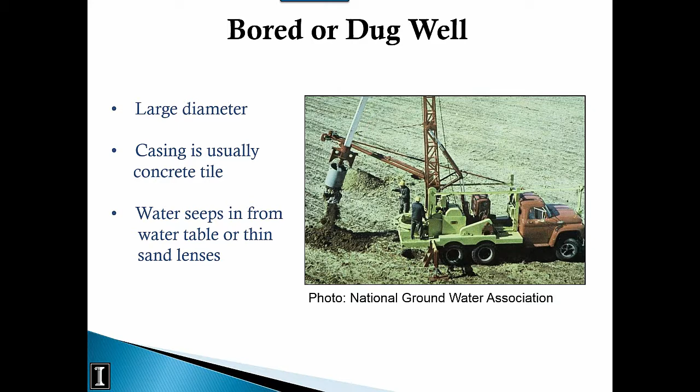By itself, that means that it's water at the upper surface of where the saturated soil is. That could be at 5 feet, it could be at 15 feet, it could be at 2 feet. So it's water that has more influence from the surface. So typically these sorts of wells, we see more contaminants than in deeper wells that are drilled and they're pulling their water from a deeper source.

These are 3 examples of dug and bored wells. All 3 of these are greater than 3 foot diameter. The one at the top left is an old hand dug well. You can see here it's on a slope in a pasture. There's a cornfield above, a gradient up above, which means there's probably been pesticides and nitrates applied.

Those posts are so worn because there's cattle in that pasture, and they come up and rub on those posts to scratch. It's covered with 2x10s and then some tin and then some concrete blocks to hold it all down. Snakes, rodents, spiders, everything else can get in that. And so that well, it would be amazing to me if that well didn't have coliform problems all the time.

And you can see even on the lower right how it looks like there's some mud there, and that's where the cattle, it's been raining or whatever, and they've been there enough that they've made that kind of a little mud spot. So all that's infiltrating in, it's coming in shallow. We still see a lot of hand dug wells that are very poorly constructed and not protected well at the surface.

The one on the right is a concrete tile 3 foot diameter well that has a concrete cap. If you assume that that's a 4 foot section of concrete tile that's sticking about a foot out of the ground, that means the first seam is down at 3 feet. Now, if this is concreted around the well down to 10 or 15 feet, then that's not an issue. But if it's not, then that means water can seep in at 3 feet.

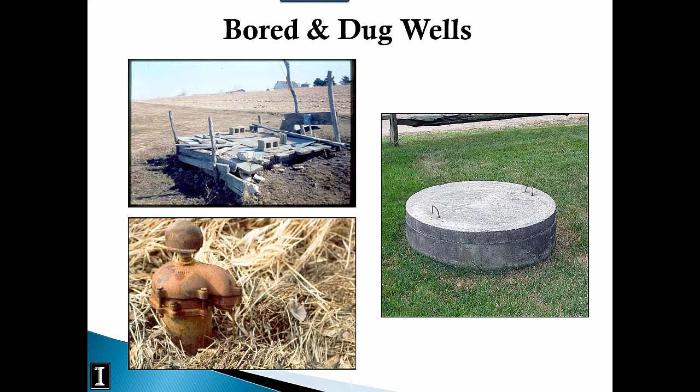So here's those 2 examples. The one on the right that was a concrete tile to the surface is the picture on the left here, and you can see they show the best practices for this is to put concrete in the upper 10 feet, or a minimum of 10 feet, so that water can't seep in from the surface and it can't get into that well until it gets at least 10 feet below land surface.

The one on the right is the picture that was on the lower left on the other side. At the top it looks like a regular 6-inch diameter well, but when you get down to 10 feet or below, then the large casing part of that starts. And again, this is an area where there's really no aquifer, and it shows in the picture here that there's some sand lenses in the soil, but it's mostly fine textured soil, clay and silt, and so those sand lenses may hold a little water, but it's water seeping through the clay and silt that gets into the well.

And the whole point of a large diameter well is to create, it's almost like a cistern. It's meant to store water so that it can seep in slowly, and then as you use water in your house, it may drop the water level down, but then overnight it refills, and it's because there's not an adequate water supply. Like you couldn't pump this at 20 gallons a minute for a day. You'd run out of water.

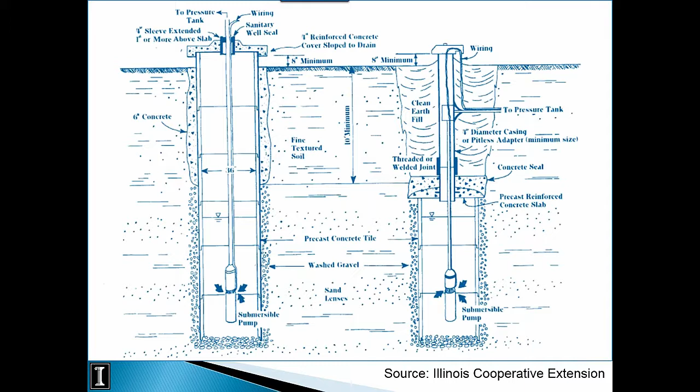And our well where I grew up was 14 foot deep. It was hand dug, and it was lined with brick, uncemented brick, so water could seep in between all the bricks. In the summer, if I left a hose in our horse tank and forgot about it, we might be without water for 2 or 3 days, and that's how long it took for that to fill back in. So it's an issue, and it really just means that there's not a good aquifer there, and that's why you have a large diameter well like that in most cases.

Okay, sand and gravel well, just like it sounds, these are wells that are finished in a sand and gravel aquifer. So this is a well screen that you're looking at. It's woven with stainless steel, with those slots a specific size, depending on the size of the sand. So if the sand grains are larger, more like gravel, then the space between those could be larger. But when you get into finer sands, then those spaces need to be pretty tiny. And the idea is the screen keeps the sand out but lets the water in.

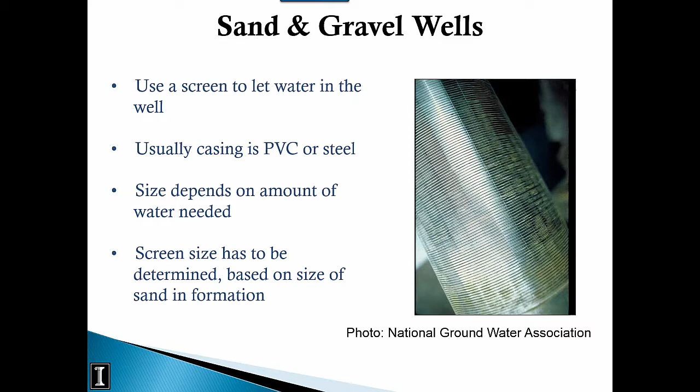A typical sand and gravel well is made out of PVC or steel with a stainless steel screen. Sometimes you see other types of screen as well, but the screen's at the bottom. And so again, the screen size is based on the sand size in the formation. So typically a driller will have a number of different screen slot sizes on hand, and when they drill the well, they're pulling samples, and if it's finer sand, they're using a smaller screen, and if it's larger sand grains, then they're using a larger screen. And then you also put gravel around that to help act as a filter for the finer sand to not get in the well.

So here's a diagram of what a typical sand and gravel well looks like. And you can see the screens at the bottom. So that's really important. This well, let's say it's 200 feet deep. A typical well screen on a 5 or 6 inch well for a domestic household well will be 4 to 10 feet or less. So if this is a 200-foot well, that means the screen's down at 190 or maybe even 196 to 200 feet below land surface. So that means that's the only place that water can get in that well. It's a solid casing other than that.

So that's very protected from the surface as long as the annulus around the casing, where the well hole is drilled, is sealed properly with clay or bentonite or concrete. Then the only place water is getting in that well is 196 feet down, as I mentioned. So you can see the pieces here. There's a screen, usually a submersible pump. This is actually a poor diagram in the sense that you don't put the pump down in the screen because that causes faster velocities and can lead to sand getting in your well. Typically it's up above somewhere.

Most aquifers, the water level rises above the level of the screen. It's either at the top of the aquifer or it's even higher if it's under pressure. So then if you're in a cold climate, you have a pitless adapter, and a pitless is basically a unit that allows the vertical pipe coming up from your pump to turn 90 degrees and go to your house at a depth that keeps it from freezing.

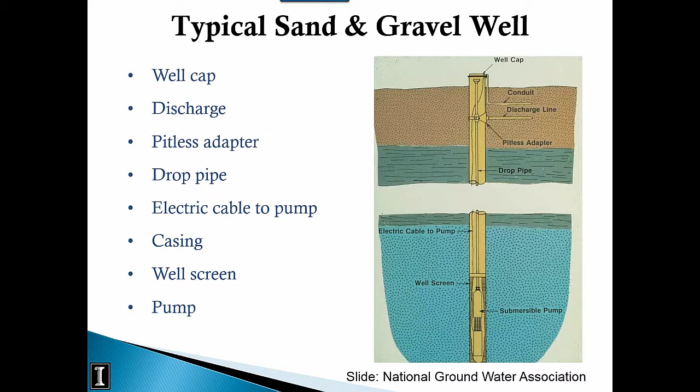Pits are dangerous. They're a safety hazard. They can flood and fill up with water, so if your cap isn't tight, they can cause water to leak into your well. Insects and other things can be in there. So they invented this pitless adapter that is a device that basically does that for you, and it slips off so that you can pull the pump when you need to. And this eliminates the need to have a pit, which is the big advantage here. So, yeah.

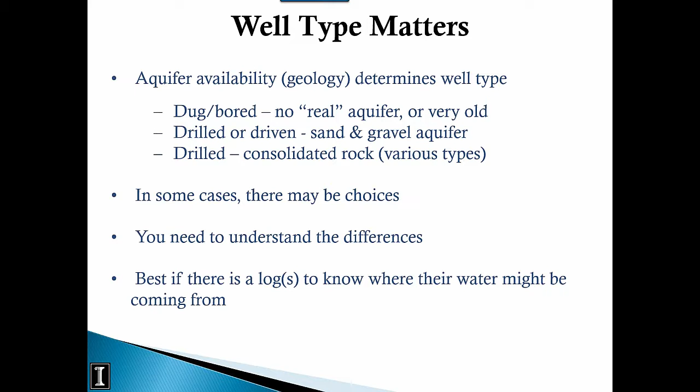You should do your due diligence and try to find a well log for a property if it's going to go on the market or whatever, so you can understand those things and what kind of risks the buyer might have when they buy the property. So as I said earlier, many of these issues are because of poor construction, and construction codes have changed over the last 30 or so years.

Illinois passed a law in 1968 requiring wells meet code and also requiring logs to be filed, but any wells that were in existence before that were not required to meet the new code. Some states like New York didn't pass that law until 2000. So one, they don't have very many well logs on file because most of them were drilled before 2000, and two, they have no idea where they're all at and how they were constructed.

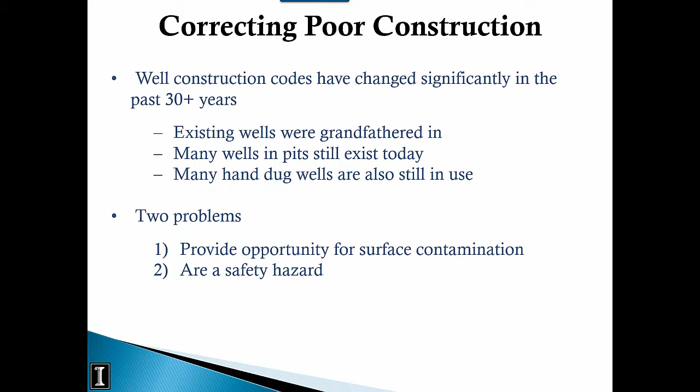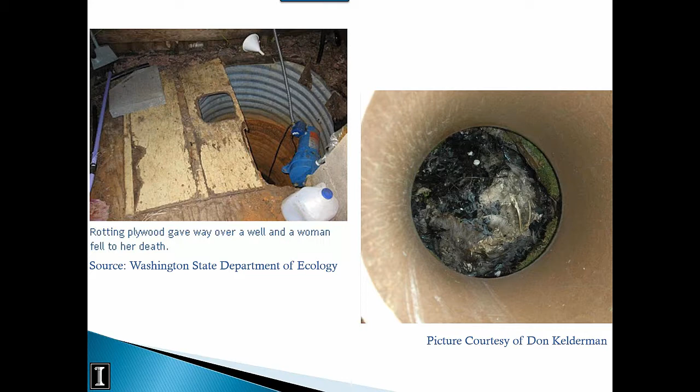The one on the right, that's a goat. And there's nothing else to say there, but clearly if a goat can get in a well, it's not very well protected at the surface. So when you work in this field, you see all kinds of crazy things. You think there's no way it's possible, but they are, and they do happen.

So what should you do? Bring this up to code, find out what the code is in your state, and make sure they're safe and that they're protected at the surface so that there isn't a surface influence. If the well's down in a pit, extend the pipe up to the surface, fill it in, and then talk to your county or your local health district, a contractor, find out what they recommend to make it safe before you try to do anything with that kind of property.

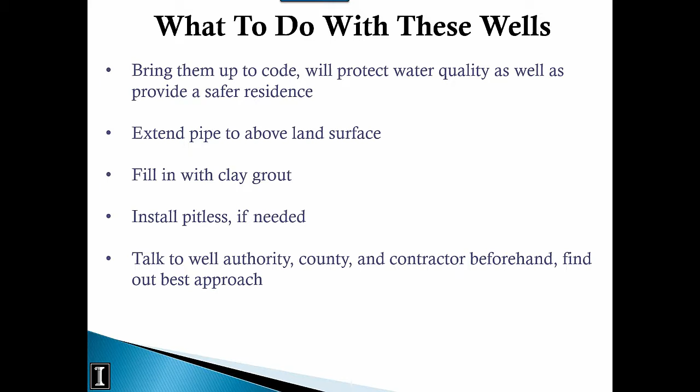Same thing with abandoned wells. Because well logs weren't required for a long time, there are many, many wells that we have no idea are even out there because they're undocumented. So like wells in pits, they're a safety hazard. As a matter of fact, both those examples, especially the one with the goat, could be abandoned wells. We've all seen stories where there's an old well on a property somewhere and somebody fell in it. Even in movies, you see that sometimes.

But if it's on your property and you have one, if you don't seal it and fill it in, or on your customer's property, it leaves you responsible. Someone falls in and gets hurt or it contaminates an aquifer, the owner of the property is going to be liable.

And so I know some states have disclosures for any other wells on a property or abandoned wells, but not everybody does. That doesn't mean that they necessarily have to do anything about it. I believe in some states they may, but the rules are so different everywhere. It really is the best thing to do is to take it upon yourself to make sure that the property is safe and things like an abandoned well are sealed before it changes hands.

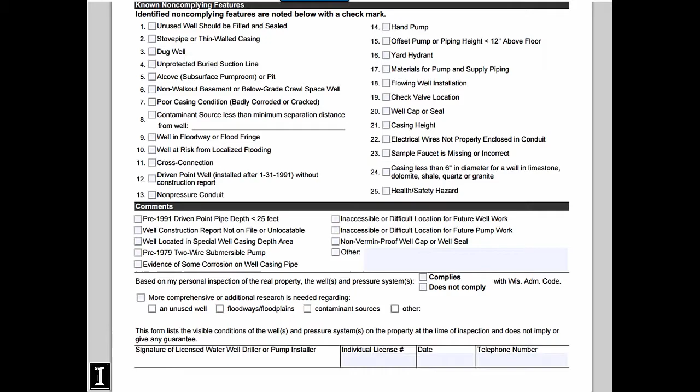I've come across wells that are in basements, that are under garages with a concrete pad over top of them. There's no way to access that well ever, right? And so all these things matter. That well that's under the concrete pad for the garage, there's no way to ever even seal that well without tearing the concrete out. So they're all for a reason. They're all meant to protect public health and the water quality in the well. And this is just the rest of that form, or I might have just accidentally put it in there twice. I apologize.

So the next thing, test the water. I've probably already mentioned this, but if you're going to need treatment, you want to know in advance. It can actually be a selling point. It makes the seller look more honest, like they're not trying to hide anything, and that they're trying to take care of things. And from the buyer's perspective, again, protect yourself, because it affects property values, and it could affect your health.

So why is this important? I guess I already told the example about the arsenic concern. Oh, actually, no, I haven't. I told the second one. Buyer beware. Why doesn't the state do more to protect me and my family? That's the woman who called me that had 150 ppb of arsenic.

This other one, though: I don't want to know. I know someone asked that question. How do we deal with people who don't want to know or don't want to get testing to find out, and that sort of stuff? Well, in Illinois, there's a law that says you have to fill out this form. Yes or no, I know of issues with my well or my septic.

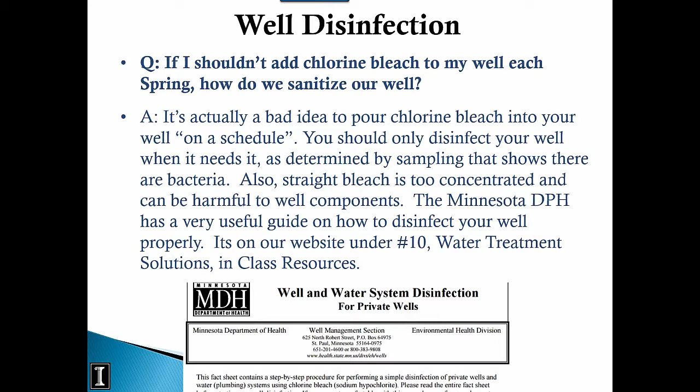And if you go on our webpage and look under resources, for each of the 10 lessons, there's a number of resources available that you can click on and download. And this is listed under Lesson 10, under Water Treatment Solutions. And it just says the Minnesota Well Disinfection Guide. And it's great. It shows you how to mix it so that you're mixing it in the proper amount. And it also has information on what to do with your treatment equipment if you have it, and what solution you should mix up based on the depth of your well.

It's just got a lot of good instructions with pictures, and as I said, even water treatment equipment on what to do, what to bypass, so you don't mess that stuff up as well. And they recommend going to the Water Quality Association, which is the trade association that represents all the companies that make treatment equipment, where you can find more information on how to protect your treatment equipment if you need to disinfect. But the bottom line is you should only disinfect when you've encountered a problem.

So the only time to disinfect your well is when you've had a positive coliform or bacteria hit. You don't do it every year. You don't do it whenever. Some people say every time you open the well. Well, every time you open the well, you should test your well. Test it for coliform.

That's a $15 test. And if it turns out you do have something in your well, then you disinfect it, and I would follow these guidelines. There's certain things you need to do when you disinfect a well. You need to make sure that there's chlorinated water in all the lines, every shower, every toilet, every faucet, and it needs to sit in those lines long enough to disinfect, typically overnight, and this explains how to do all that.

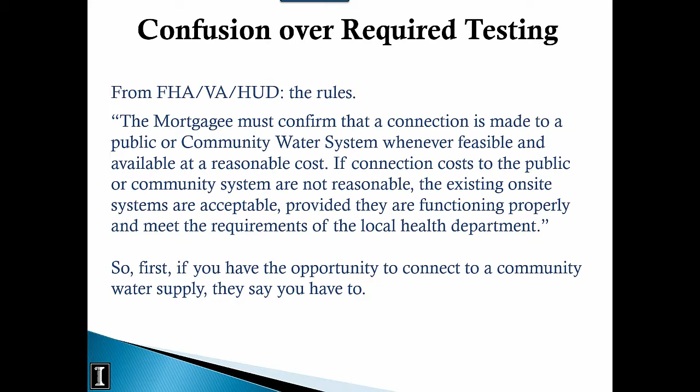From that, though, if you do have to have an individual water supply, then what the rules say today is that the water quality has to meet the conditions of the local authority with jurisdiction. That means a local or county health department. But if the local, county or state health department don't have water quality standards for private wells, then the water quality must meet the standards set forth by EPA in the National Primary Drinking Water Regulations.

That means that HUD is saying if the county or a local jurisdiction or the state don't have requirements at a property sale for testing, that you have to meet all the same standards that a community water supply does. That would cost several thousand dollars to sample for all those things. I don't believe hardly anyone does this. I think it's a problem, and it's something that needs to be addressed eventually about the way HUD's written this rule.

Because what's happened instead is there's a lot of misinformation out there and people trying to skirt around those rules. So this list here at the bottom is a PDF that we found on a website for a mortgage company. And a number of people are using this and saying that this is what HUD requires. Lead, nitrate, nitrite, total nitrate/nitrite, total coliforms, and fecal coliform E. coli. This is not the law. This was in a mortgagee letter in 1994, and it was superseded in like 2000.

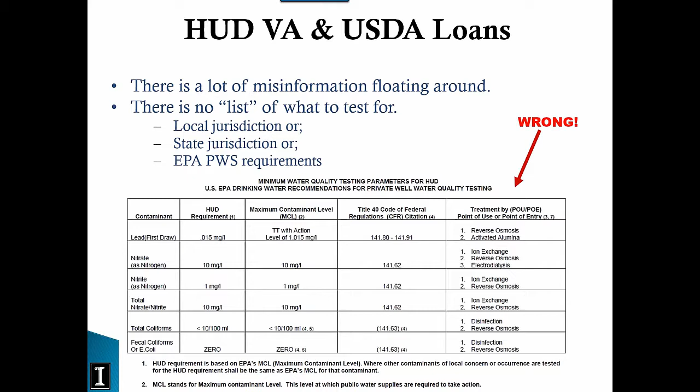So this hasn't been the rule forever, and yet I know as late as last year there were groundwater groups or folks that support private well owners who are using this form and saying this is what HUD requires and sending letters to a mortgage company or to a bank or whatever in support of a well owner who needed this testing done. So it's not the law, and that's the bottom line. And yet a lot of people are using some of this information as if it were. So that's all I'll say on that.

Trying to get through to HUD or to any of the other groups, federal agencies that are involved with this issue has been a real struggle. We've tried, and especially since the election, it's kind of fallen flat. And at some point we're trying to get them to consider changing their rules and maybe even developing a committee of folks to come up with something that makes more sense, because people aren't going to spend $2,000 or $3,000 on water samples to get a loan, just the way it is.

So bathing versus drinking. I just want to point out, someone asked a question, differing levels of contaminants safe for bathing but not drinking. I would say this is generally true, because usually drinking is more of an exposure than having it on your skin, but it's really a contaminant by contaminant issue. And Dan, do you want to add anything here?

Yeah, I don't really have too much to add. I would say you make a pretty good statement here. I don't know much about the skin exposure levels. I usually think of skin as being a pretty good barrier, but of course there are some things that can get through. So I just think of most of the drinking water contaminant regulations being for consumption, like drinking.

Because for arsenic, for instance, the level's 10, but I know they tell people it's okay if it's 40 or 50 or whatever. You don't need a whole house arsenic removal system so that you're not exposed to that in your shower. You just need to make sure you have it on your tap in your kitchen so that your cooking and your drinking water are that lower level. But I'm sure there are other things where that's not the case, and it's just as much of a risk.

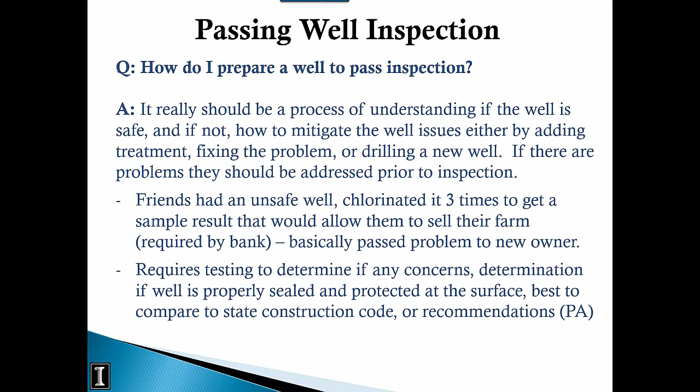There's many people out there whose well's gone dry and a driller can't get to them to put in a new well for 6 or 9 months. So I'm pretty sure those costs are even higher there. So, it's an issue. It depends on where you live. It's like anything else. It's market demand in a lot of cases. So yeah.

How can I safeguard my well from hazards and pollution, and how can I learn more about the pumping and mechanical parts of a well? Well, the first step is to take our class. Like I said, it's 10 lessons. It's self-paced, so you sign up and it walks you through how water gets into wells, well types, all that information, and it's about 88 pages, I think, total, but it's a really good basic course on private wells.

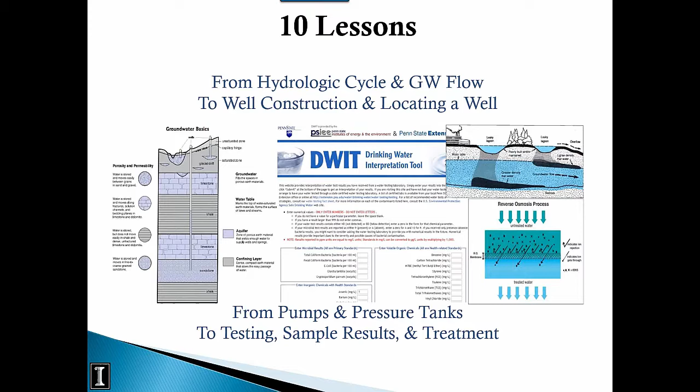So there's 10 lessons. They go all the way from explaining geology and hydrology to talking about contamination and how things like RO works, reverse osmosis units. And so, why does my pump kick on or off all the time? Just a lot of different things that are available through those 10 lessons.

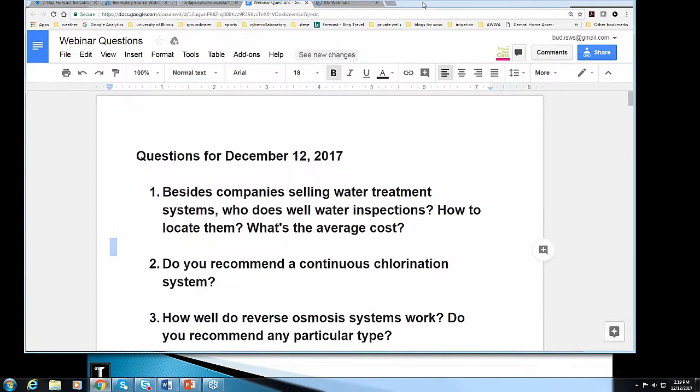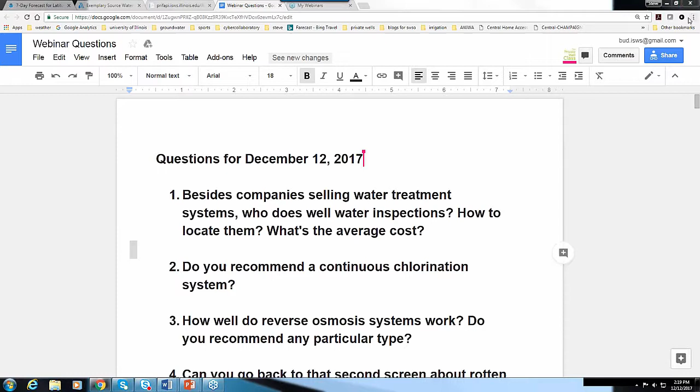But I'm going to slide over the questions, if I can figure this out here, make this full screen. Well, I'm struggling. Okay, there we go. And is that large enough? Move that down. There we go. That should be plenty large.

So the first question: besides companies selling water treatment systems, who does well water inspections and how to locate them? What's the average cost? If you go back to the webinar we did for realtors in February, that question was asked and we answered it there. So I didn't put it in here again because no one asked about cost this time in the questions asked in advance, but I believe it ranged from like $200 to $600 for an inspection.

But I don't think I would have a water treatment company necessarily do a water well inspection. I would have a licensed well driller or contractor, or there are professional home inspectors who have training in well inspection. I know one of the home inspection licensing associations contacted us about using our class to help their members learn more about private wells. And so we got them in touch with NEHA, the National Environmental Health Association, and the end of that story is that now home inspectors can go on NEHA's website and take our class for free, and it helps them with maintaining their license as a home inspector.

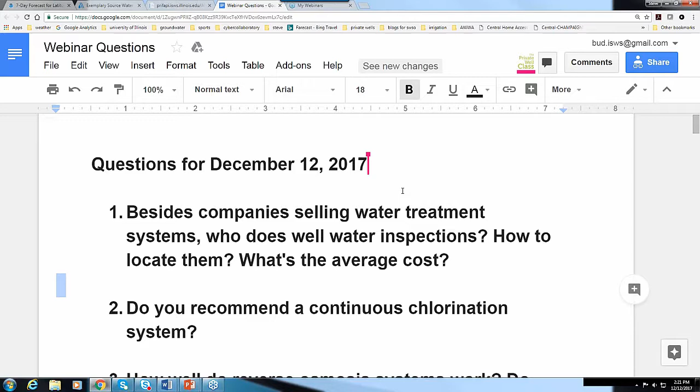Okay, so Dan, do you recommend a continuous chlorination? Oh, I can answer that too, I guess. Do you recommend a continuous chlorination system? I mean, my take would be only if you need it, right? Yeah, I think so. I think only if you need it.

I don't think too many of the customers we work with have them, although they're not rare or anything, but it's not like the continuous chlorination system is going to be the answer for all water treatment. It might solve a bacteria issue, but shot chlorination would hopefully solve that. You may need the continuous chlorination, but if you have an arsenic issue or something, it's not going to do anything for that.

Well, and I would say that most of the time we hear from well owners that they don't want chlorinated water. They don't like the taste of city water because it has chlorine in it in some cases. And so I would say that most people want to avoid that from our experience. That doesn't mean everyone does.

But where we see continuous chlorination typically is where it's a shallow well and they keep having bacteria problems, or they know there's some kind of shallow connection, or a spring, like Southern Illinois, Indiana, Tennessee, Kentucky, and actually a lot of other places where folks are using a spring for their water supply. Those are too susceptible to bacteria not to use some kind of continuous disinfection. You see UV too, I guess.

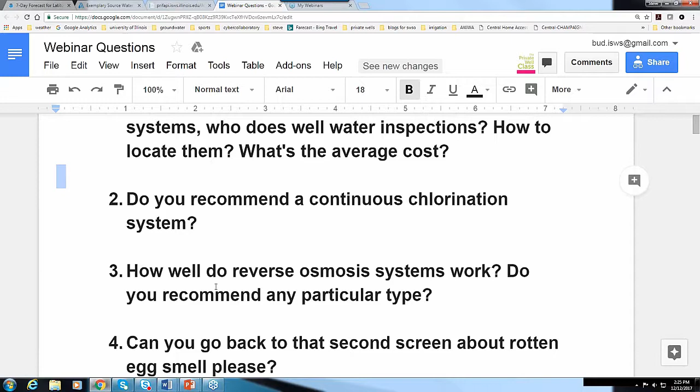Okay. So as far as this last question here, can you go back to that second screen about rotten egg smell, please? Well, I guess I can go back, but we do record this. It'll be on our website. And if this is the last question, I will go back for you because we are done for the day, and I'll leave that up if you want to hang on. So I'm going to put this up here.